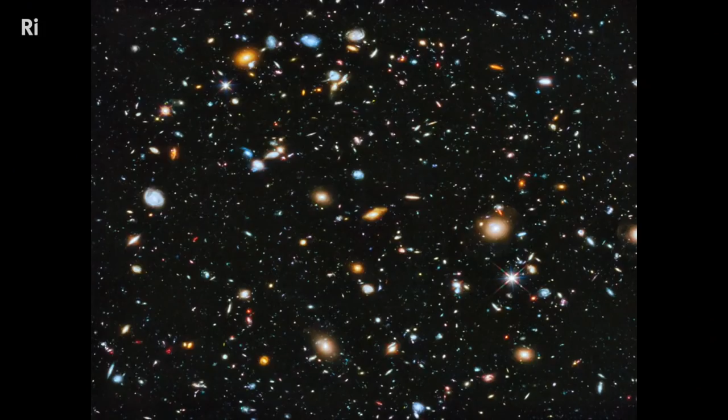The Big Bang. So this is the moment at which the universe as we know it was born, and the moment at which each one of us was connected to each other atomically and to the rest of the universe atomically. One of the fundamental laws is the first law of thermodynamics, and it really thinks big, that the amount of energy needs to remain constant. It says that energy cannot be made or destroyed, but it can be converted from one form to another.

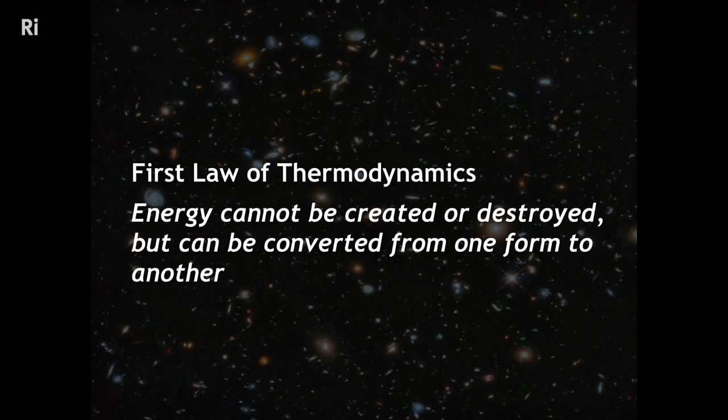And it's this idea of conversion of energy that brings us here tonight to discuss devices like batteries that allow us to store energy in a chemical form and then transform that chemical energy into electrical energy as and when we need it. So before we delve into the geography of battery cells, let's take just a short history of how these batteries were developed.

So the term battery was first coined by Benjamin Franklin. And it was in the backdrop of US independence that there was an experiment carried out that really shocked the world. Galvani, an Italian scientist, had long thought that there was a sort of link between movement and electricity. And in one of his experiments, he connected a lightning rod to a frog's leg and then waited. And when lightning struck that rod, the leg moved.

And this really shook the scientific world, and it also influenced Mary Shelley at the time, who was writing her novel Frankenstein. Now, shortly after this, Volta started thinking, okay, Galvani thinks that this electricity is intrinsic to this frog. What about this electricity being intrinsic to metals? And he started looking at combining different metals together, metals like copper and zinc, to see if you could elicit some electrical current. And sure enough, he did.

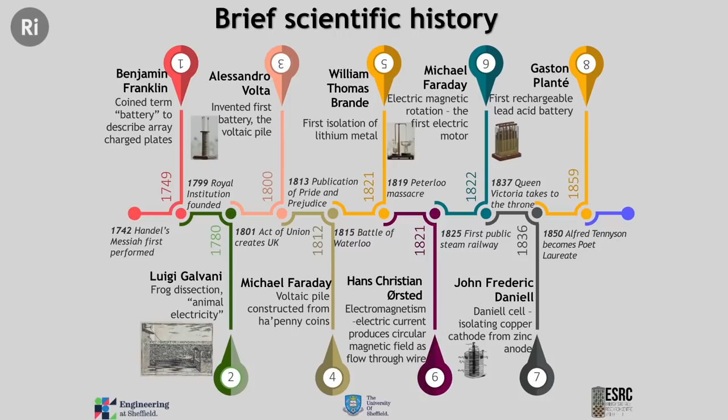Following on from that, there were further discoveries in batteries from John Daniell, a British scientist who made the first Daniell cell. And then following on from that was the discovery of the first rechargeable lead-acid battery. This was by Planté, and this was used to light lights in carriages at the time. And of course, now in cars, it's used for ignition as well.

It was Faraday who had really looked at this link between chemistry and electricity. And looking at the work that he did and the work from Coulomb, we can really start to understand electricity and chemistry and start to think about things in a quantitative way.

Here I've just shown an image of Faraday's lab here at the Royal Institution, and also a picture of Faraday giving his Christmas lecture in this spot, because I thought that was a really sweet picture to show tonight.

So Faraday, through his laws of electrolysis, had looked at how we can measure, we can think about electricity and think about the mass of materials that are involved in these sorts of transformations in electrolysis. And from that, we can work out quantitative information about our batteries. For example, the capacity of a battery. We can think of that as a measure of the charge that the battery can store. And this really depends on the mass of what we call active materials.

These active materials are things like electrodes, and it was Faraday that gave us those names: cathode, anode, ions, cations, and anions, and electrolytes. We can think of capacity as sort of the maximum amount of energy that can be extracted from a battery under certain conditions. And we can measure this in a number of different ways, and we're going to hear about that later in some of the next talks.

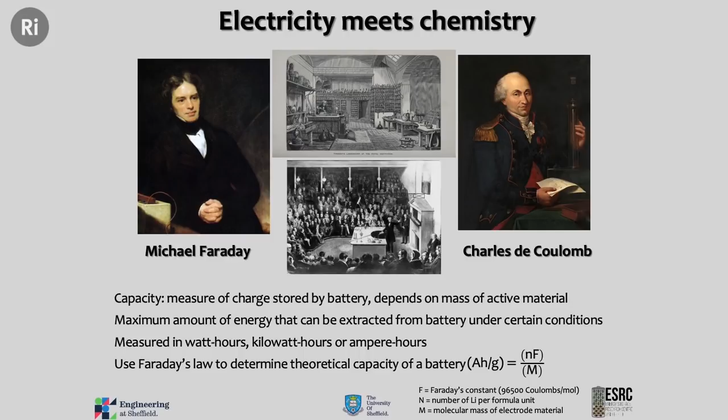So tonight's talks are really focused on lithium-ion batteries and lithium-ion battery chemistry. So we should look back over some of the key papers that brought about this wonderful discovery that powers our electric vehicles increasingly, our portable electronics. And one of the first publications here that I'm showing is from Lewis, a very famous chemist, who had looked at the potential of the lithium electrode.

And some work had been started then in 1913 on lithium batteries, but the first lithium-ion batteries were not commercialized until the 1970s. In the 1970s, there was the first publication of electrointercalation, so the movement of lithium ions into and out of a material. And this is by Stanley Whittingham, who looked at titanium disulfide materials.

This was very quickly followed by the pioneering work of John Goodenough, who had discovered lithium cobalt oxide, a material that's still used in our batteries today, which facilitates the movement of lithium into and out of these structures. He'd done this work at the University of Oxford at the Inorganic Chemistry Laboratory, which you can visit and see this blue plaque dedicated to him.

And in the 1990s, Sony commercialized lithium cobalt oxide batteries. Very quickly followed reports of spinel-type materials, manganese spinels, and iron-based phosphoolivine materials. And this sort of research area remains extremely vibrant and exciting even today.

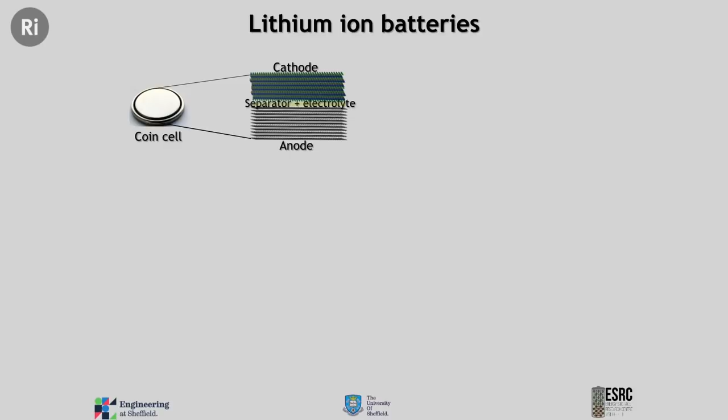So let's look at a lithium-ion battery cell in a little bit more detail, and we can break it down into its component parts. So this is a picture of a typical coin cell, which you may have seen in some of your devices. It's made up of a cathode, which is our positive end of the battery, an anode, which is the negative end, and then there's a separator that keeps the two apart. And between those, there's something called an electrolyte.

We can understand what each of these components does if we start to hook this up to an external circuit. So this is my imaginary battery, and my cathode, my anode, and my electrolyte. So I have my positive cathode and my negative anode hooked up to an electrical circuit, and that permits this flow of electrons around this circuit.

And because of the chemical reactions that are going on inside this battery, you end up getting a buildup of electrons at that anode. The electrolyte plays a hugely important role. It doesn't allow electrons to move from that anode across to the cathode. So the electrons are forced out of that cell around this external circuit. And on that journey, they can start to power things that they're hooked up to, like, for example, this light bulb that we have. So the electrons move around that external circuit and perform their function.

What does the electrolyte do then? The electrolyte is what permits the flow of lithium ions in a lithium-ion battery. So it's ionically conducting, but electronically insulating.

If we look in detail at this kind of cathode material, this is called lithium nickel manganese cobalt oxide, which is a bit of a mouthful, so we call it NMC for short. And the little letters that are after its name tell you a little bit about the makeup of that material, so how much nickel there is, how much manganese there is, and how much cobalt there is.

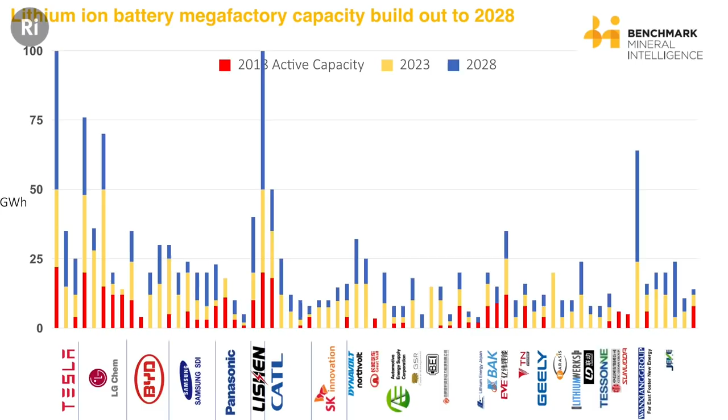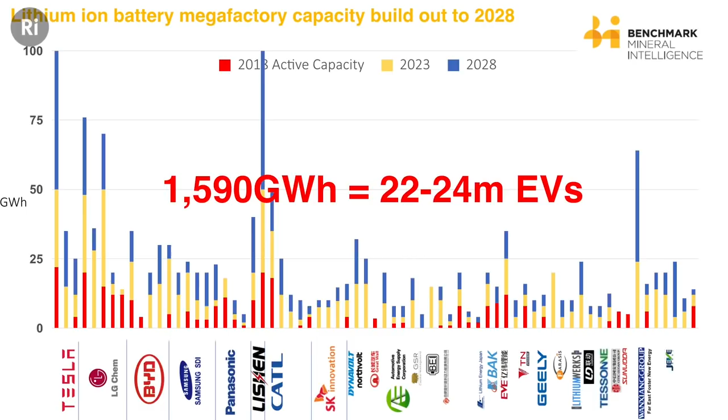This is where we're going by 2023. This is where we're going by 2028, and more of these plants being announced as we speak. One last week was announced in India, which we haven't got on this chart. So that will intensify as the world needs more batteries. How many pure electric vehicles does that equate to? It's about 22 to 24 million. So when you look at these big announcements, like VW this morning announced they want to build 70 pure electric vehicle models by 2028, you realize that isn't a lot of batteries. We're going to need a lot more.

This is in the middle of the Nevada desert, not very far from Reno, actually, so actually a great location. But nearly all of that, 75% of that is battery making. Only 25% is car and battery pack making. So really, the challenge here for all gigafactories, megafactories going forward is getting as much of the supply chain on one site as possible, reducing the logistics between all the components from raw materials to battery cell.

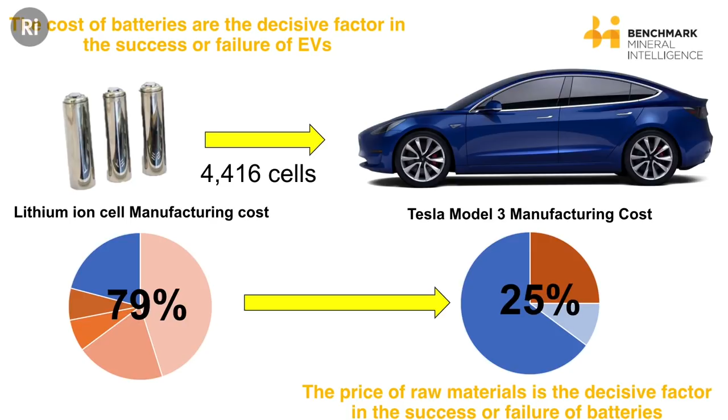The bottom statement, the price of raw materials are the decisive factor for the cost of batteries. So this is why the raw materials are so important: scale, quality, and cost. So big statement number 2, the lithium-ion battery supply chain are the oil pipelines of tomorrow. What are the raw materials to watch? We like to call them the 4 horsemen of the ICE apocalypse. So that's the internal combustion engine, ICE, which is the cars on your road, for those that don't know.

We've got lithium leading the charge. We've got the dark horse graphite, which doesn't get much kudos and coverage, but it's the anode material of choice. So it is so important that graphite keeps pace with the rest of this industry. Cobalt doesn't have a very good reputation. And nickel there, trying to kill cobalt because there's a trade-off with increasing nickel, reducing cobalt. We could talk about that a bit later as well.

You can see coal and oil are dying a death at the bottom, and the house that ICE built being knocked down. But the 4 horsemen of the ICE apocalypse are quite like that. So final few slides. Lithium supply. I used lithium as an example, but we can talk about cobalt, graphite, nickel later on in the Q&A. Most of it, actually, a decent chunk of it is coming from Chile.

This is the Salar de Atacama. It's actually brine mining, so low impact, where you're pumping brine out the water, evaporating the liquid away and extracting the lithium and other minerals, and then you're putting it through a processing plant.

Actually, the majority of feedstock now comes from traditional hard rock mining in Australia. That's your traditional mining where you can get a rock concentrate. That gets shipped to China, and that then is processed into battery lithium within China. And again, the key thing to understand is lithium is a very small industry.

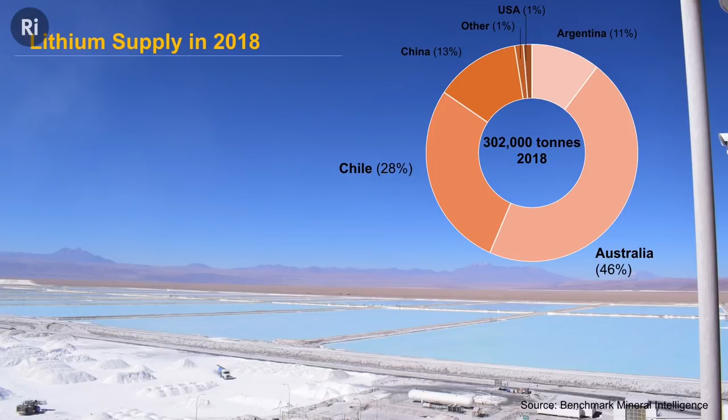Last year, 300,000 tons, give or take, produced. LCE, this is lithium carbonate equivalent. But all the commodities you're used to hearing about, coal, copper, oil, they're in the millions or tens of millions of tons. So lithium needs to get to well above 1 million tons by mid-2020s to keep pace with the demand. Don't think it's going to do that, but the point is that it has to go from the niche to the mainstream, and it's not a commodity, it's a specialty chemical, which complicates the supply chain a little bit more. So this is lithium demand.

This is a big boy, Andy Miller. I put this in because his mum's here tonight. Andy Miller isn't with us. He's over in the US, but I thought Catherine would like that.

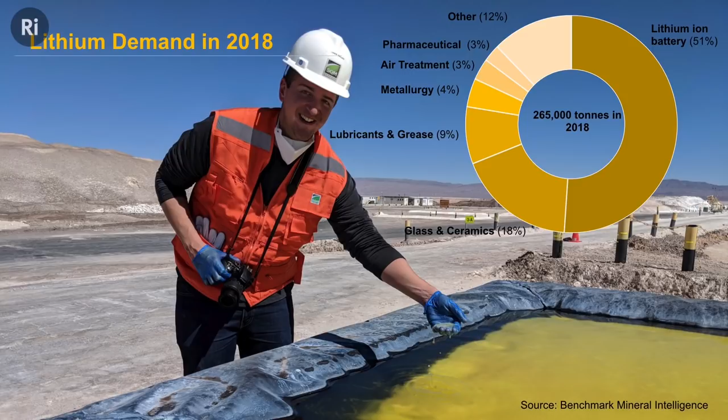Again, from a demand perspective, look to the right-hand portion of this pie chart. Lithium-ion battery, 51%. It's important to note that now with these raw materials, it's the same for cobalt, it's similar for graphite, that the battery end use is now taking over the majority of the supply chain. So once you go past that 50% mark of this mineral being used in batteries, then the industry, the producers, the supply chain recalibrate everything they do towards lithium-ion batteries. That wasn't the case before, so that's something to bear in mind.

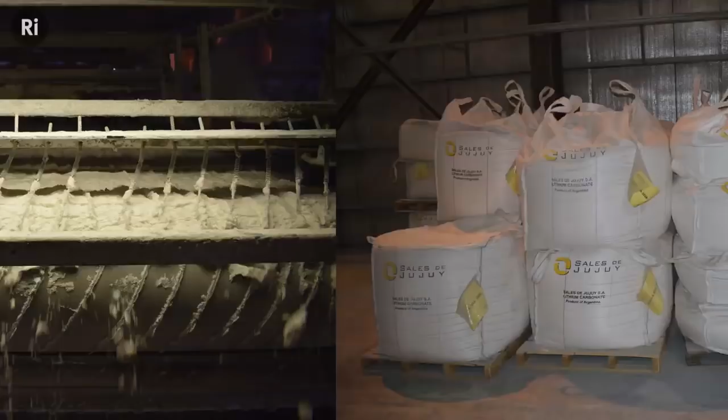Then they take the chemical out of the ground. On the left, they turn it into a white powder, effectively. That's what lithium carbonate looks like. On the right, they bag it, and then they will send it to the Tesla Gigafactory, for example, in this form, where they mix it with the other cathodes, the NCM or the NCA material, and then it goes into a battery. Final 2 slides.

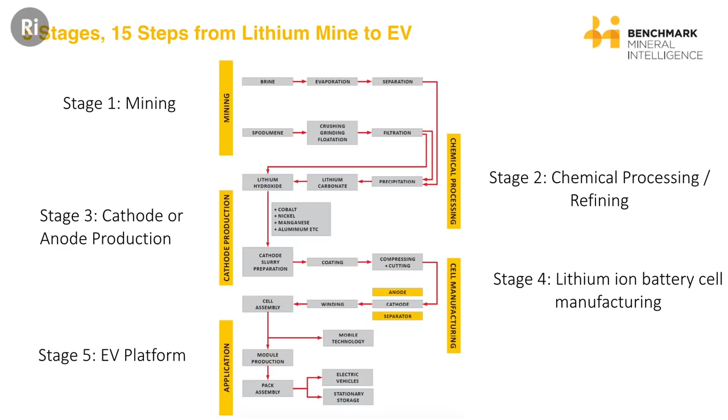The reason it's complex and difficult is there are 5 stages. More importantly, there are 15 steps to get lithium out of the ground and into an electric vehicle. So there's 15 steps for it to go wrong, 15 ways to qualify that material, 15 hurdles it has to go over, so it's not straightforward. As a result, price volatility is now the norm. Lithium's price has increased 4x. It's come off since, but still remains high. And that's the same for cobalt and other raw materials going into a battery.

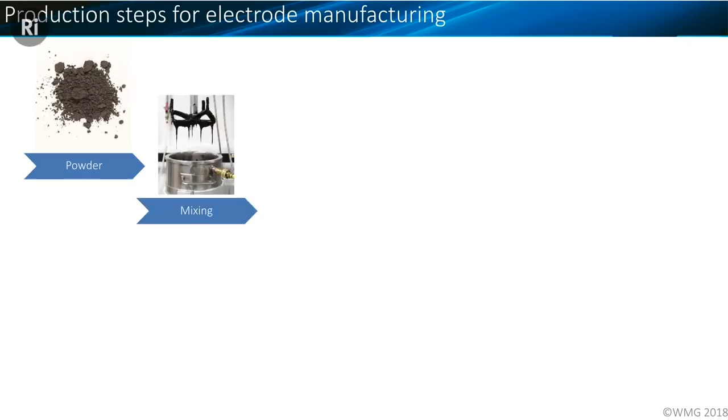So what we do first is we take our powder and we mix it into an ink, and we mix it with carbon black typically, which is a nice conductive additive that links the electrical current all the way from the particle to the foil. And we'll mix in some binders, and that's basically an adhesive that makes the carbon stick to the foil. And then we use a solvent which makes it liquid so that we can start to print it, and we're going to dry off that solvent. And as we dry the solvent off, it's going to leave porosity behind it, and that gives us that beautiful microstructure that you saw earlier.

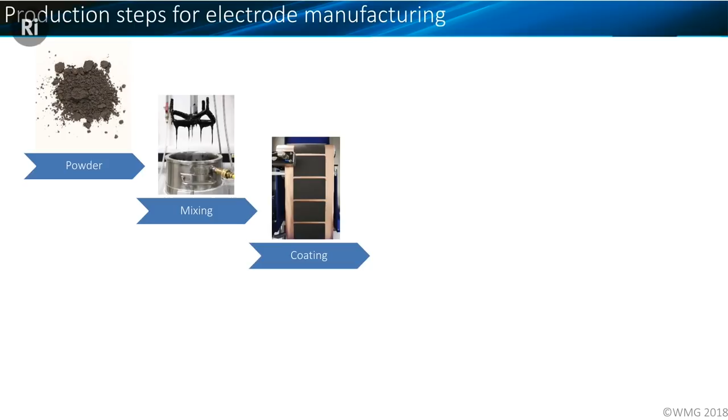So we coat, and I'll show you a video of that in a moment, on a reel-to-reel coater. To make the kinds of volumes that we're talking about, this is something that has to happen at very high speed. I'll show you some more details in a minute. But this is something that has to run on a continuous process line at about 120 meters a minute to be able to make the quantities of batteries that we need.

And then we have to dry off the solvent, and that actually takes a tremendously large amount of energy. The solvents that we use for our anode are typically things like water. They're quite benign. But at the moment, we don't really have any good solvents for cathodes that aren't fairly unpleasant. We use a substance called N-methylpyrrolidone. Brilliant solvent, really horrible for health. So we have to be very careful how we control that in an industrial environment.

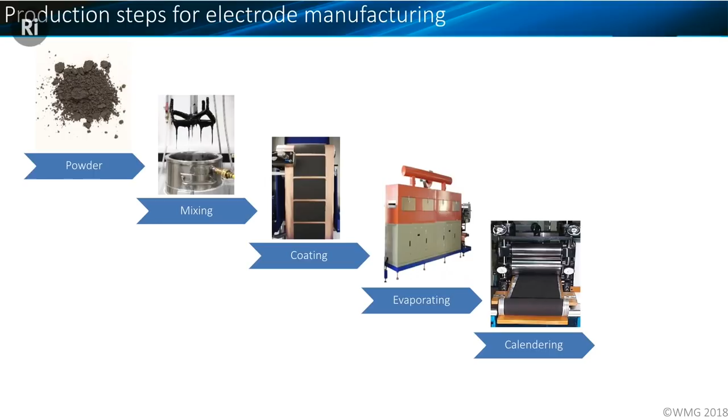And then we do something called calendering. We run that very carefully coated microstructure through the world's biggest mangle. And what that does is it compacts it all down and it gets a bit more density in there to give us a bit more energy storage before finally we chop it into pieces. And once it's chopped into pieces, we can assemble it into cells. And we can assemble those cells in one of two typical formats.

We can cut those cells into big sheets, like rectangular sheets, typically about the size of maybe an A5 or an A4 book, and we stack them like a lasagna. And what we're doing is trying to get as much contact area as possible between the anode and cathode sheets with those separator layers in between. And if I cut them as rectangles and stack them lasagna style, I get something that I call a pouch cell.

The other way that we can do this is we can print it onto very long, thin strips, and we can roll those strips together. And that makes me a cylindrical cell of the 21700 sort that you saw in Simon's presentation. And I've brought a couple of those along with me tonight.

So the battery industry is not very imaginative, so this is called an 18650 cell. That means it's about 18 millimeters diameter and it's about 65 millimeters long and it's about circular. All of those are actually "about" to an engineer. A 21700 is 21 millimeters by 70 millimeters. You get the idea, it's not complex.

But what we've got inside this cell, if I was to open it up, is our roll of materials, all tightly packed. Don't do this at home, by the way. At home, this is full of caustic electrolyte, and it will do you no end of harm. Do it when you make these in the lab for fun, and you don't put the electrolyte in. But what you see in here is a roll, and in that roll, we've got the layers of anode and cathode material separated by this white polymer separator material.

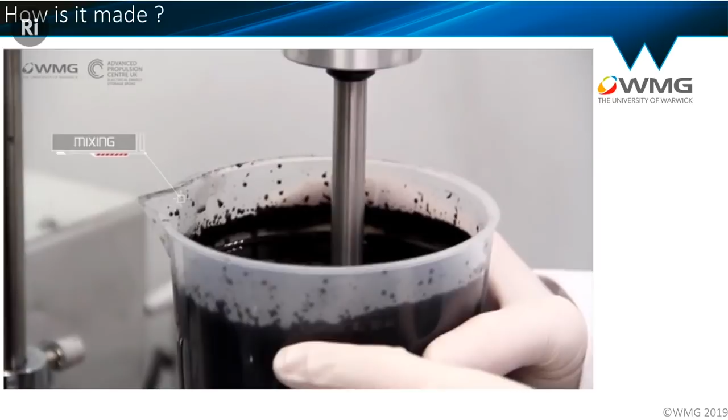Thank you very much. So what you can see here starts off with the mixing process. This is done in a lab environment. This is not what a factory looks like. So we're mixing up that ink, which is a bit like a kind of molasses type consistency. We then pour it into a reel-to-reel coater where we lay that coating down onto a roller. We draw the foil up against it, and that draws off the coating to give us the coated foil that we're looking for. The drying actually takes place in a closed cupboard that you can't see, and then we stamp

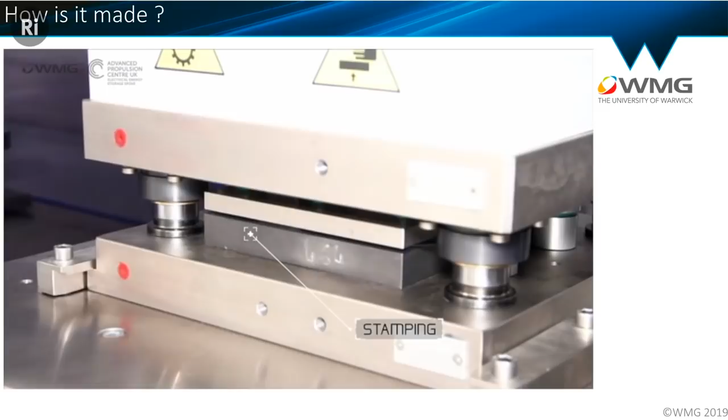the materials. We use a robot to assemble them because the alignment of those anode and cathode foils is absolutely critical to the quality of the battery. It's one of the things that can cause it to fail early in its life. We then seal it into a material which is actually very similar to a coffee bag. Coffee bags resist moisture for about 3 months. That material resists moisture for about 15 years. And having done that with the electrolyte, we then take the thing off, ready to form.

Now, in our laboratory, we can make about 20 cells a day using researchers. If you were to walk into a gigafactory, you'd see individual lines producing something more like 20 cells per second. And that's one of our challenges. And we don't just put those cells directly into the car. We first of all have to put them into sub-assemblies which are manageable. So we take our cell, whether it's a pouch or whether it's a cylinder, and we assemble them into things called modules. These are really just sub-assemblies.

And what we're trying to do at this point is to keep the voltage of each of those sub-assemblies below about 60 volts, so it's relatively safe to handle. And we're trying to keep the mass down to about 50 kilograms or so that it can be handled in a factory environment. And ideally, we want that module to be reusable across many different electric vehicle types so we can get some economies of scale out of its manufacture. And then we'll join those modules together to make the battery pack.

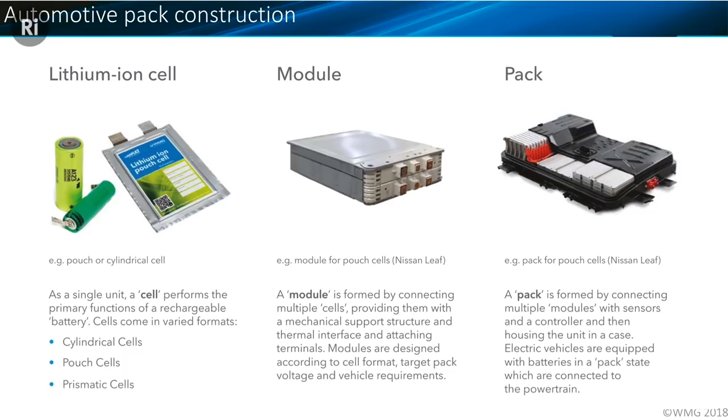And the battery pack, you can see the Nissan Leaf one on the slide behind me, typically covers the whole of the floor of the vehicle, typically weighs somewhere between 300 and 900 kilograms. So it's a fairly substantial piece of equipment. And then that gets bolted underneath the vehicle, typically on the production line for the car. And the fact that that pack is large, it's heavy, it's hazardous goods, means that there's a lot of benefit to doing the assembly of that very close to where you do the assembly of the car. And that's important for us for reasons I'll come back to in a moment.

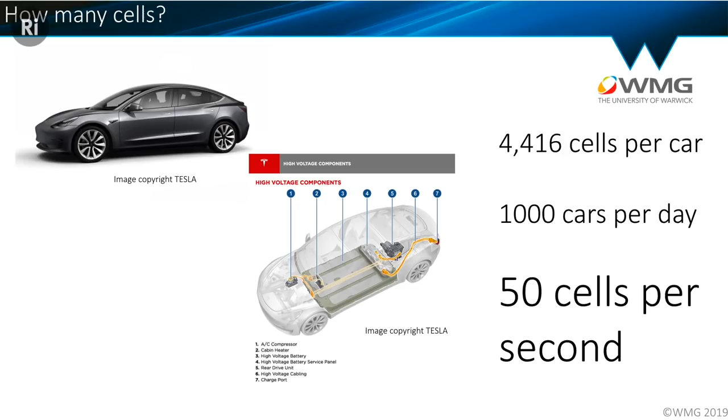So as Simon said, our Tesla Model 3 has about 4,400 of those little cylindrical cells inside it. And Tesla's finally reached its magic number of about 1,000 cars per day in manufacture. If you want to multiply that up, that means that just to produce one model of car, that factory has to produce 50 cells every second. And given that as well as the Model 3, they're also making the Model S, the Model X, and a whole bunch of other stuff besides, actually the gigafactory that's there doing about 20 gigawatt hours today is doing about 125 cells per second.

The fastest miniguns that get connected to helicopters by the RAF for shooting at targets, the very fastest that they've ever made that have gone to production, are about 125 rounds per second. It just gives you a bit of an idea of the rate that these factories have got to be operating at. And that's how you get to the things like the gigafactory. So it takes about 4 billion of investment just to get to the point we are today to do 20 gigawatt hours.

And as Simon said, this is only about a third of what Tesla want to be doing in the long term. And that's already a 200,000 square meter facility with about 3,000 staff. So it's a fairly significant industrial endeavor. It's also a massive commercial opportunity, whichever way you look at it.

So the reason that the UK is interested in all of this is the UK at the moment has a very good industry in cars and particularly in making engines. We make about 1.7 million vehicles and about 2.4 million engines every year. And the engine is about 1/3 of the value of the car, bill of materials cost. But when we move to an electric vehicle, we replace the engine with an electric motor and some power electronics, and that costs about the same as the engine.

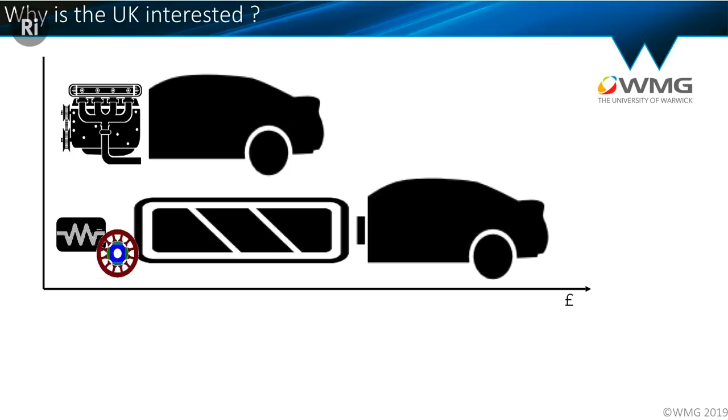Then we put a battery in place, and that costs typically 3 to 5 times the cost of that engine, and then we put the rest of the car on top of that. So there are two things that you'll notice. The first thing is the total cost of our vehicle has gone up significantly. The second thing is that nearly 50% of the bill of materials cost for a long-range electric vehicle is embedded in that battery. If we see that as a bought-in component, that's outsourcing an enormous amount of the value creation that happens in the car industry in the UK today. So economically, as well as technically, it's important for that to be a component that we have an ability to deliver.

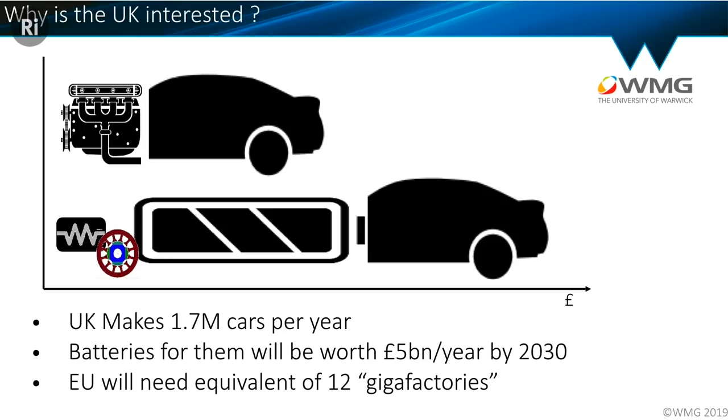If we look at the kind of volumes that Simon's slide showed around what we've got to get to by 2028, 2030, across the EU, we're going to need the equivalent of about 12 of those gigafactories at the size they are today. And to support the UK industry, if we supply it domestically, that's space for about 2 to 4 gigafactories of that size. Actually, there are some very good arguments that say that the economies of scale suggest you want smaller factories, probably about 10 at about half of that size. So that's a big opportunity for the UK.

And in response to that, the Faraday Challenge and the Faraday Institution, which has sponsored today's event, has been set up to accelerate the UK's research efforts, our innovation, and our industrialization of batteries, going from the achievements of Goodenough in the 1980s as the inventor of the lithium-ion battery to try to place us in the position where we've got large-scale manufacturing and exploitation of that technology coming from the UK.

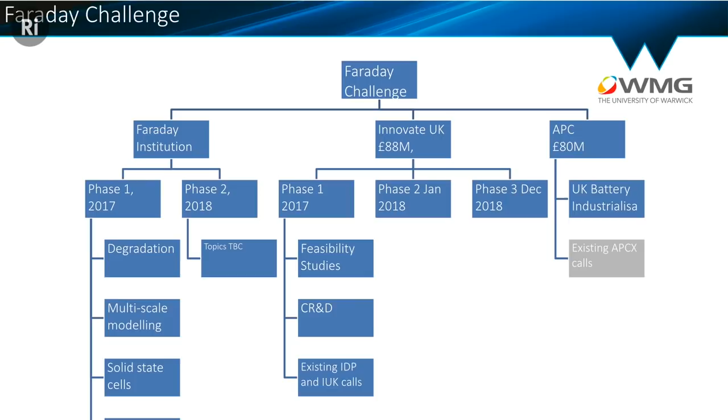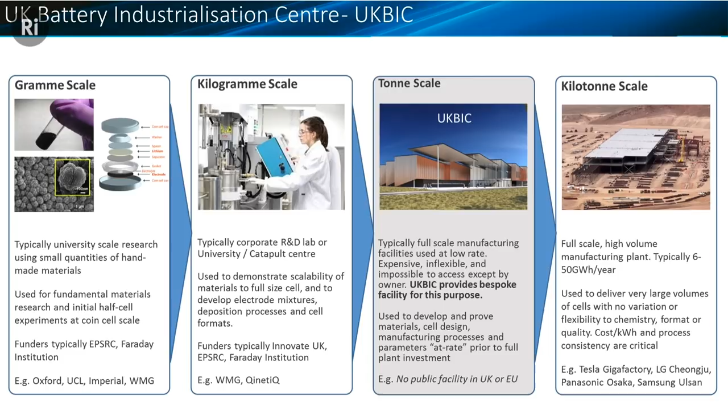And to make that jump from laboratory into full-scale factory, what you need is the ability to trial those manufacturing processes. If you're going to be making 50 cells a second, you want to make sure you're making them right, because if you're losing money off them, then making more is a really bad idea. So what we need here in the UK is a facility that lets us look at that manufacturing journey as well as the scientific journey.

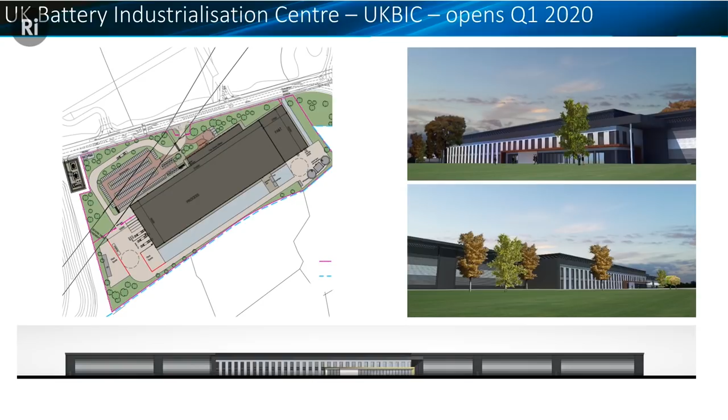And a part of the Faraday Challenge is the construction of something called the UK Battery Industrialisation Centre. And that's being built in Coventry. It's not very far away from my own institution at Warwick. That's a 20,000 square metre facility. It's about 1/10 of the size of a gigafactory, so it's still a pretty significant endeavour. And that'll have the ability to do about 1 gigawatt hour per year manufacturing capacity.

And that allows material suppliers, manufacturing companies, car companies to start designing cells, designing new manufacturing processes, and bringing new materials forward to market. And what we hope is that that's going to give a springboard in the UK for a large-scale manufacturer to set up, to link into the R&D and the development efforts here, and start to supply some of the major OEMs that we've got based in the UK. And that, I hope, is a good opportunity to hand over to one of the major OEMs that we have here in the UK. Thanks, David.